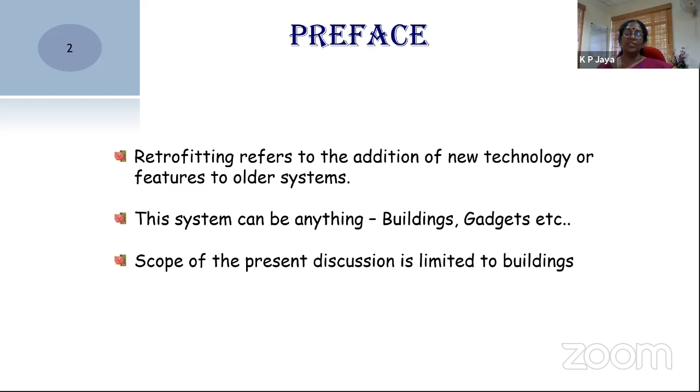Like what we are experiencing now with the corona effect—after some time, any crisis will pass by. This too will pass by. We will look forward with a positive attitude.

This is the effect of an earthquake. What is the after-effect? We are left with damaged structures and debris, as seen in the last slide.

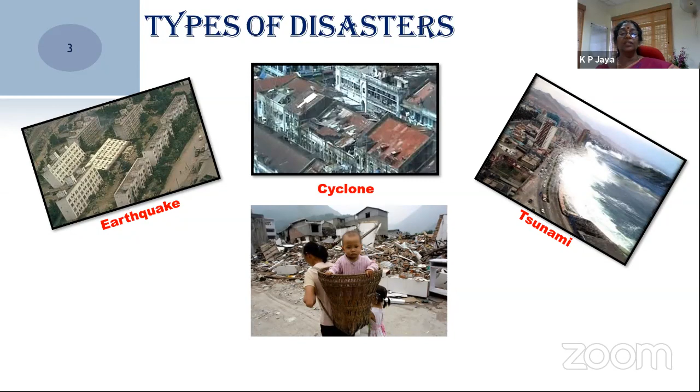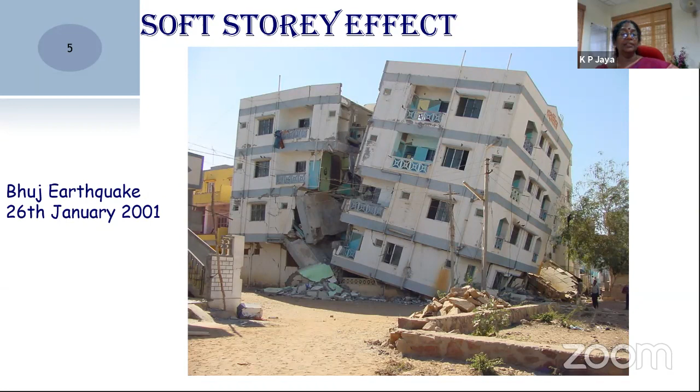This picture is also from the 2001 Bhuj earthquake. Until that earthquake occurred, we Indians were least bothered about designing structures for lateral loading. After that, people started thinking a lot and came out with proper solutions for building earthquake-resistant structures. Now look at the second figure.

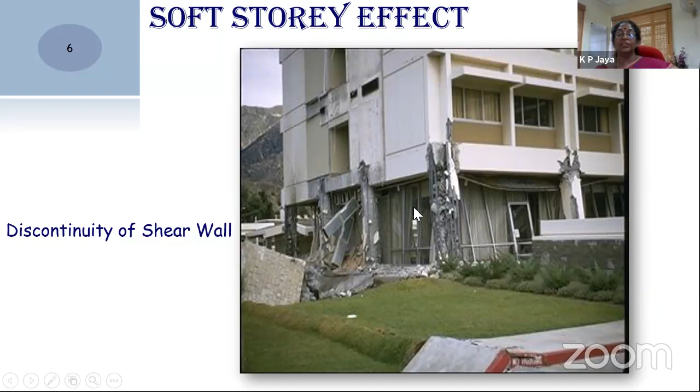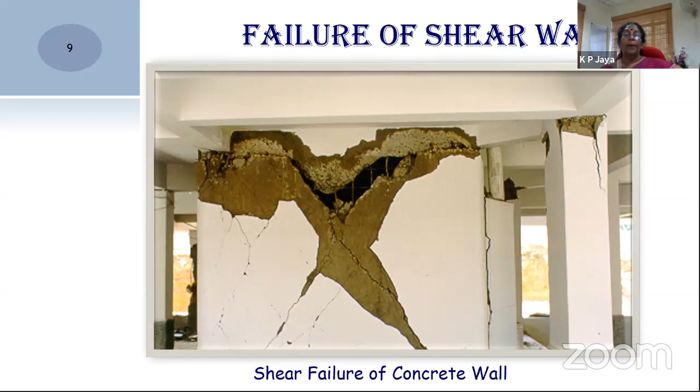This picture has introduced some fire into my mind, which led to giving this as a research topic to one of my research scholars, and she has come out with a very proper detailing between the shear wall and diaphragm.

Okay, next is the improper connection between the precast structures. You can see here, this is the precast plank, this is the precast beam, and here you can see the precast column, on this side and this side. This is the precast wall panel also.

And during the earthquake, what will happen? This column may be deflecting towards this side, and this column may be deflecting towards that side, which leads to opening up of the top surface of the structural system. So these planks will lose the supporting base from this portion and will fall down. Just look at the precast structural elements - all elements are very strong and intact without any failure. But what has failed? The connection has failed. At the end of the day, the structure has failed. So we need to give proper connection detailing between the precast structures too.

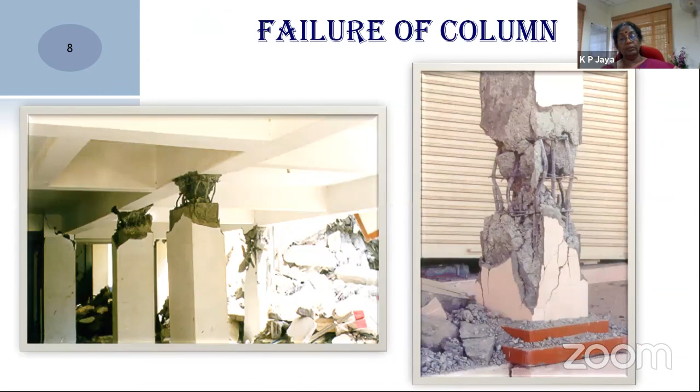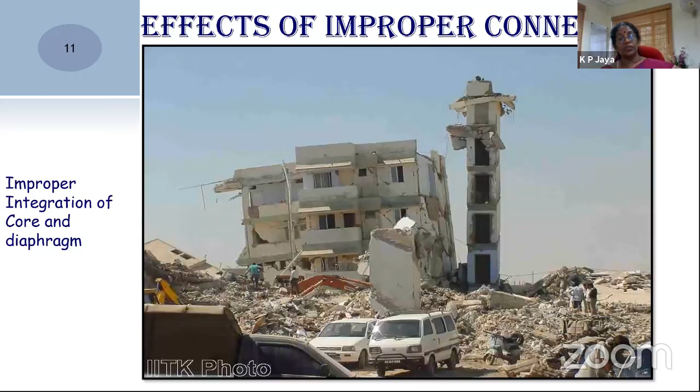So what is the remedial measure? I have discussed the failure patterns during a disaster, especially lateral loading, either earthquake or wind. These are the different types of failure which will be experienced by the system, and what are the remedial measures to arrest or avoid such failures.

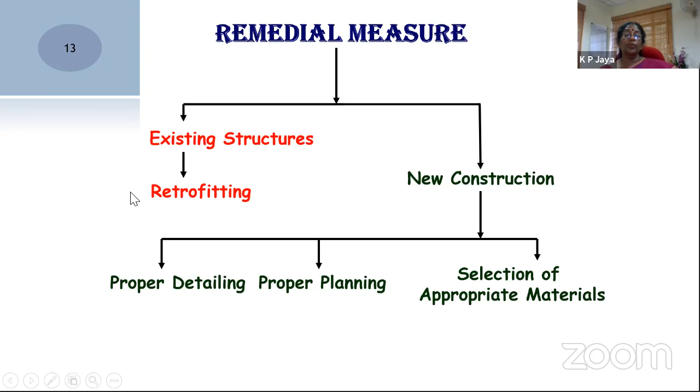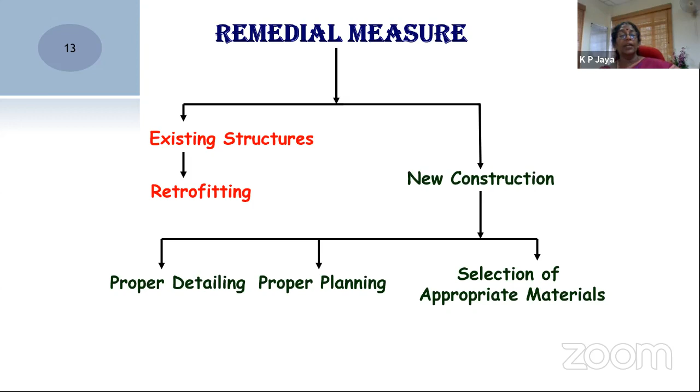For existing structures, we can go with retrofitting. If the structure is experiencing a very limited level of damage, which is serviceable even after the earthquake, we can go with retrofitting. In case of new construction, we can go with three strategies: proper detailing, proper planning, and selection of appropriate materials. So today's lecture is focusing on how we can avoid failure of structures which experience very limited levels of damage, which can be retrofitted back and put into use after an earthquake.

So, phases of the retrofit program. These slides show what phases have to be accommodated in case of retrofitting. First is vulnerability evaluation. Vulnerability evaluation means what is the level of damage possibility for a structure. This can be evaluated by considering the structural vulnerabilities of the overall system, the seismic hazard prescribed for that particular site, and socio-economic consequences. These three items will decide the vulnerability of that particular structure in the area under consideration.

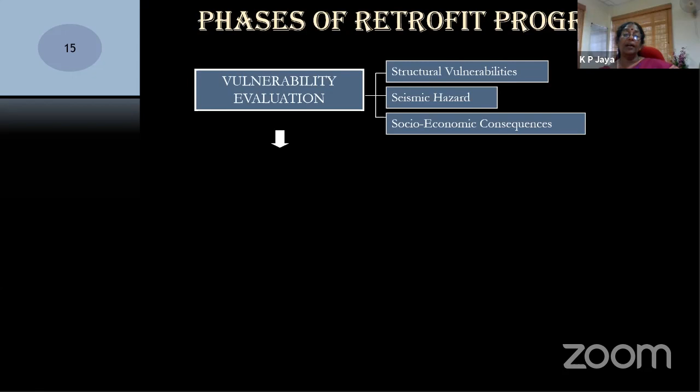Now look into this - the next step is evaluation of the existing system. System means system capacity. We have to evaluate the overall capacity of the global system and what is the demand, the seismic demand.

If an earthquake happens after 10 years, what will be the force exerted on the particular structure which is retrofitted? That is nothing but the seismic demand. There should be a proper ratio between demand and capacity. Demand should be much lesser than the capacity.

That ratio has very high importance in the system and the selection and design of retrofit measures. So member response and global response should be analyzed to choose the retrofitting measures to be adopted for the structural global system.

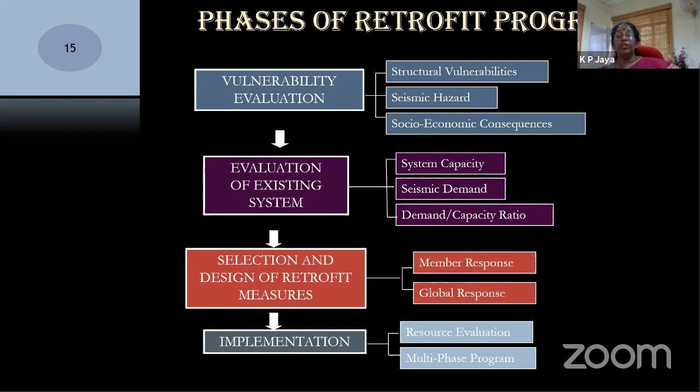Implementation is very, very important. We should find a very talented, experienced firm to execute the work. And resource evaluation - we should evaluate the resource capability of that company. It is a multi-phase program. Definitely, we have a lot of things to do while implementing the retrofitting methodologies.

This is the overall phase of the retrofitting program. First is vulnerability evaluation - evaluation of the existing system and defining the demand capacity ratio. Based on that, we should choose the design retrofitting measures to adopt and choose the appropriate executing agency.

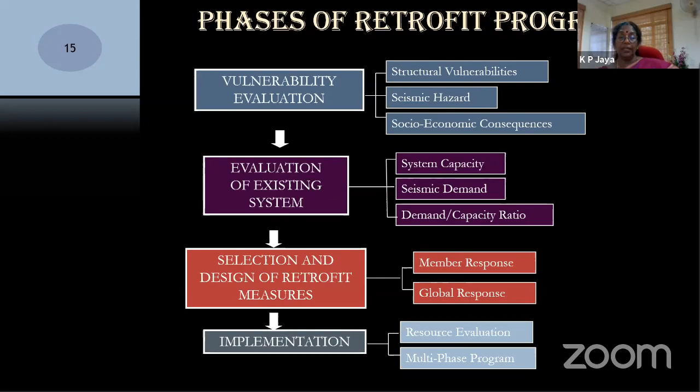First thing is seismic vulnerability evaluation. We should evaluate the site-specific hazard. It is based on local soil condition and soil response and failure.

So local soil conditions play an important role in deciding the excitation experienced by the building, and soil response as well as failure of the soil. If it is a very hilly area, the soil can experience sliding. So there are a lot of issues.

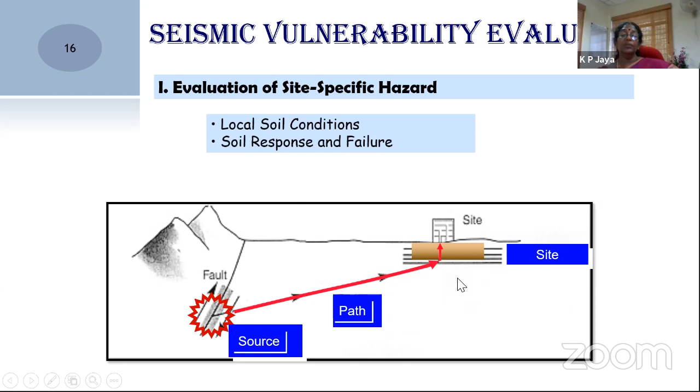You can see in the next slide, due to soil condition, structures can experience bulging of soil leading to failure of the structure. So this is the evaluation of site-specific hazard. Soil condition plays a very important role in developing these types of damages to the structure.

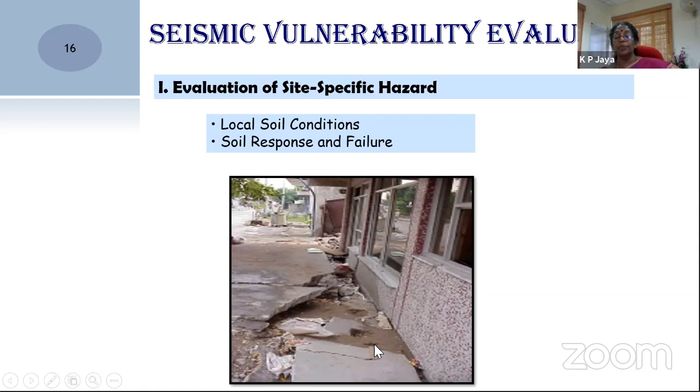Now come to the evaluation of structural vulnerability. We should evaluate the capacity and, at the end of the day, what will be the demand on the structure. Based on that, we have to identify the appropriate geometry - it has to be symmetrical in plan as well as in verticality.

When evaluating structural vulnerability, the date of design and construction is very, very important. The residual strength of the structure has to be evaluated to arrive at the demand capacity ratio.

So this is the global vulnerability evaluation strategy. When you come to the local or elemental level, what are the vulnerability evaluations? We have to concentrate on these elements - columns, beams, and so on. First I'm talking about this column.

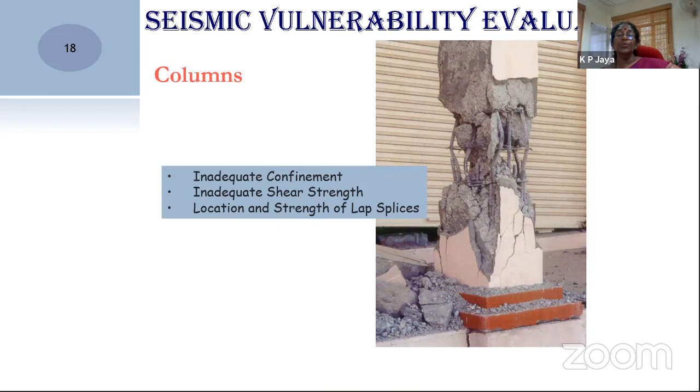Just look at this picture. This damage is due to inadequate confinement, inadequate shear strength, and location and strength of lap splices. So these are the reasons for the failure of this particular column.

In order to avoid this type of failure, what strategies do we have to adopt? We have to adopt that while doing the retrofitting.

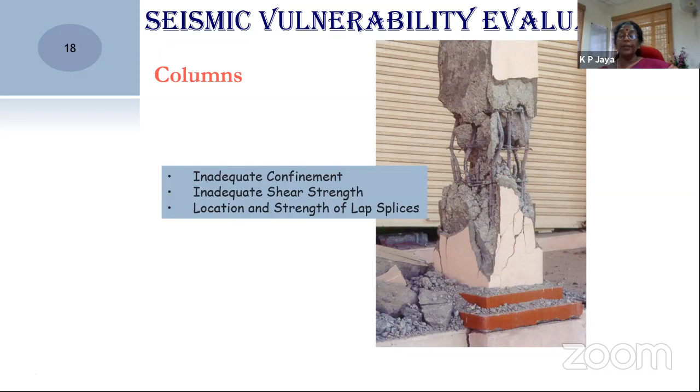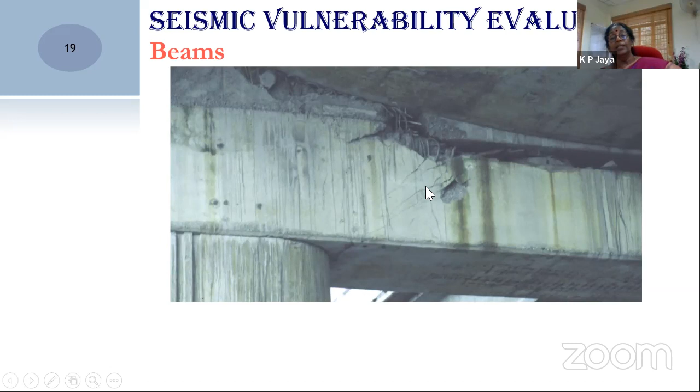Next comes the beam. Just look at this failed beam. It has failed at the top surfaces, and you can see the shear cracks in these beam surfaces. This may be due to reduced flexural strength, or insufficient bar anchorage, inadequate shear strength.

That has led to the failure of the structure with development of shear cracks here, inadequate strength in torsion - it is subjected to torsional warping also. So all these things, flexural, shear, and torsion, have caused the failure of this particular beam. So again, we have to identify the proper retrofitting strategy to regain the strength of this particular beam.

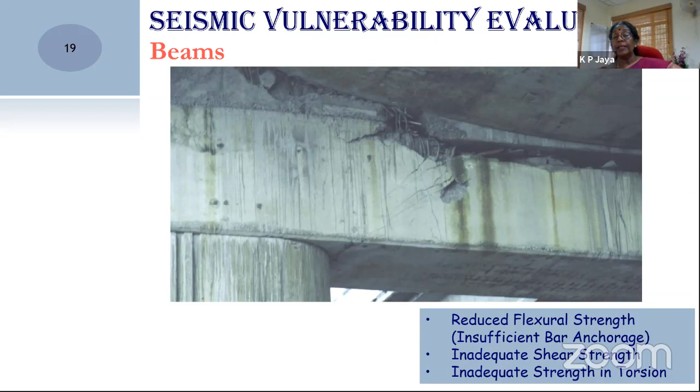Then look at the joints. Joints are very, very critical, crucial locations. You see here, this is the beam-column joint - this is the column and the beam. Due to shear crack development at the joint region, the joint has experienced spalling of concrete.

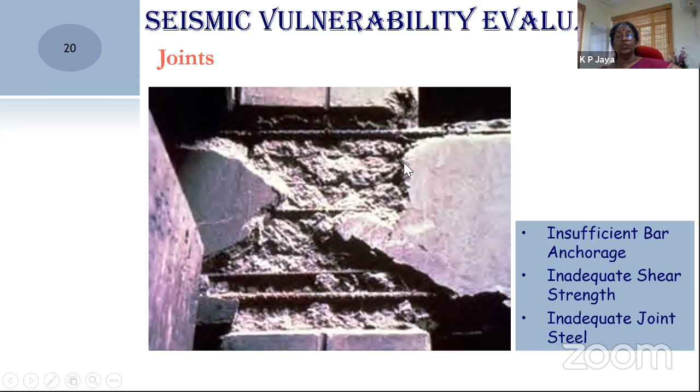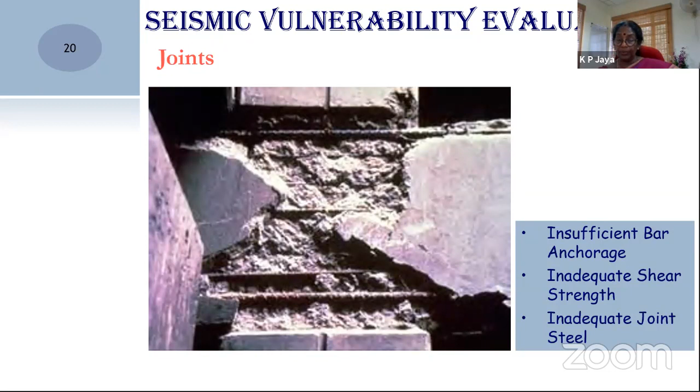The shear reinforcement has been exposed, and there is a possibility for retrofitting this particular joint. And this says what is the reason for failure of this joint region. So when you are retrofitting the joint, we should look at the reasons for failure. We have to attack the reasons from the root cause and do the retrofitting methods.

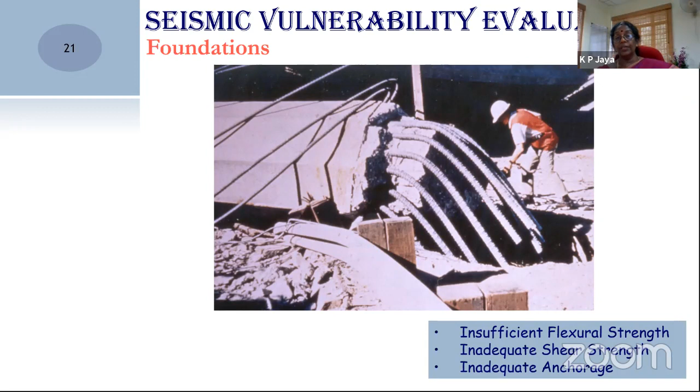You have the columns with the dimensions 300 by 300 or something like that. We will replace some part of the concrete and we'll add some also with a higher strength of concrete. That is what is called the replacement of concrete members. Or sometimes we will replace a column with a shear wall. That also comes under this category.

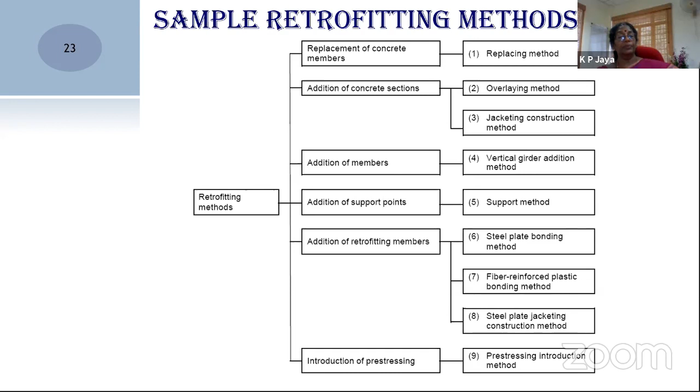So how can we approach the retrofitting method? There are two basic strategies, the global method as well as the local method. Global has two main categories: conventional method and non-conventional method. The conventional method is, as I told you in the previous slide, we can add additional shear wall, additional infill. These two will add additional stiffness to the floor.

This additional infill methodology has been adopted in some of the buildings in the Bhuj area after the earthquake. Imparting additional infill will enhance the stiffness in that particular floor. And adding bracing also will impart additional stiffness to the system. And sometimes this bracing can be a damping system we can introduce.

Thereby we can impart some system which is capable enough to dissipate the energy which is hitting the structure. And adding additional wing walls will give additional stiffness to the system. Wall thickening and mass reduction. That is a very innovative method. With mass reduction, we can reduce the mass overlaid on top of the vertical elements. Thereby we can safeguard the system.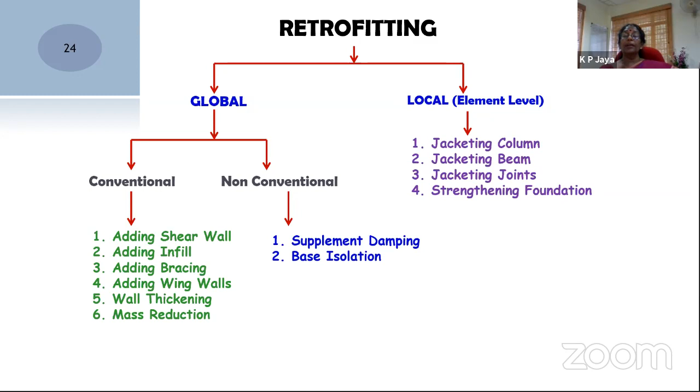And local or element level retrofitting strategies can be adopted, like jacketing columns, jacketing beams, jacketing joints, and strengthening the foundations. This is the difference between the global and the local system. In the global system, we are enhancing the performance of the overall system. In the local retrofitting, we are enhancing the performance of the individual elements.

Now I'll attack global retrofitting strategies. You can see here, this is what I told. This is a retrofitted open ground story building after the Bhuj earthquake in 2001. You can see here, this is additional brickwork. Here also you can see additional brickwork. This is a residential building which has been given parking space at the bottom floor, thereby given openings at this point and this point.

During the analysis of this particular structure, it is understood that the bottom story has less stiffness compared to the top story. You can see here all the intermediate portions between the columns on the first floor as well as the second floor have been filled with brick wall. But in the bottom story, only one column was here and another column was here. And this portion was open, which led to lesser stiffness at the ground story.

And after analysis it is understood that it is not necessary that all openings have to be closed. You can see here, this particular opening is still open. We can identify appropriate locations where we can provide an infill to enhance the stiffness of that floor. Accordingly, we can fill in with brick masonry. This is only brick masonry, not reinforced concrete. This will improve the stiffness of the ground story, thereby leading to the safety of the system. This is the installation of masonry wall to enhance the overall performance of the structure in a global strategic manner.

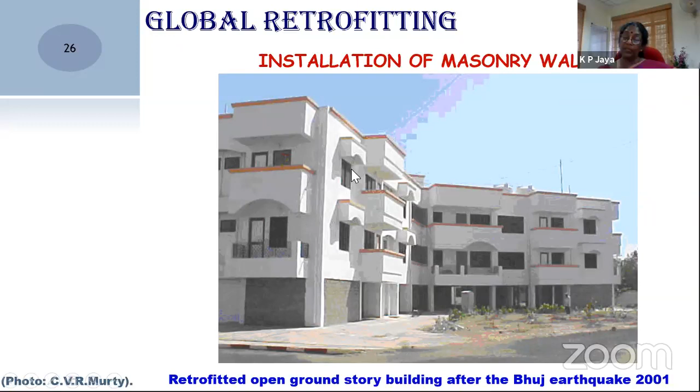This you can see here, installation of new shear wall. Here you can see before retrofitting, this area was infilled with brick wall. In order to improve the stiffness of the system, these brick infill walls have been replaced with the RC shear wall. This is the installation of new shear wall. This shear wall you can see here.

In this particular case, the column has been supported on an isolated footing. This column has been supported on an isolated footing. And in this case, these two have been combined with the additional foundation at this area. And the shear wall reinforcement needs to be extended to the bottom foundation to get sufficient strength in the system.

So this is another methodology. I have taken this courtesy of Professor C.V.R. Murty. He is a pioneer in the area of earthquake engineering. So these are the strategies suggested by the earthquake community to enhance the strength of structures with the introduction of shear walls.

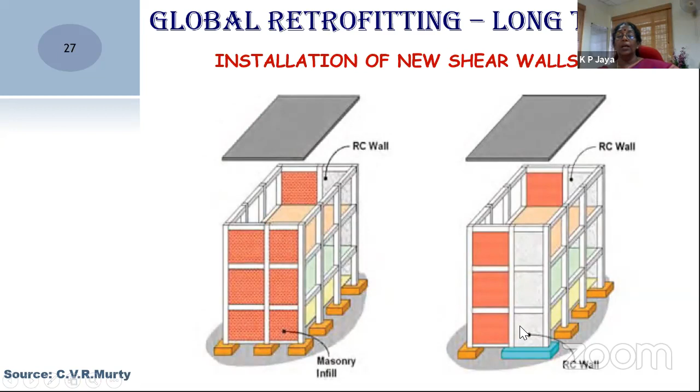Now, while introducing the shear wall, you can see here, this has to be properly stitched. This is the boundary element. This would have been a column at the extreme end. You can see in the previous slide, one column is here, another column is here. The reinforcements from the shear walls need to be stitched with these columns on either side as well as the beam on the top. That is what the picture shows in this slide.

You can see here, this is a new shear wall. This is the existing frame, this is a beam, and this is a column. And this is the introduced shear wall, which has to be linked with the existing elements through dowels, which have to be passed through the beams. For that, we need to drill holes through the beam without disturbing the existing longitudinal reinforcement of the beams. These are the dowel bars, introduced to connect the existing frame to the newly introduced shear wall. This is very, very important.

Dowels through the existing structure, whether through the columns or through the beams, have to be extended fully. This is the earlier frame. Into that, these beams have to be drilled to introduce this shear wall. And in addition to all those things, the shear wall will have its own reinforcement.

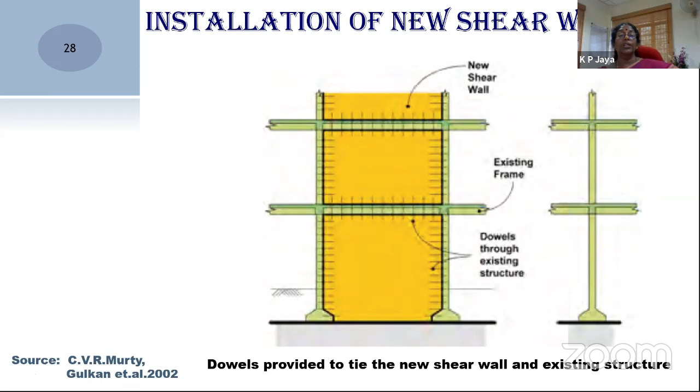So this should be the strategy to be adopted by installing the new shear walls. Coming to the picturization, that is the typical symbolic representation. This is the actual picture from the site. This was the earlier available column, and here also an additional column was there. This is a newly introduced shear wall.

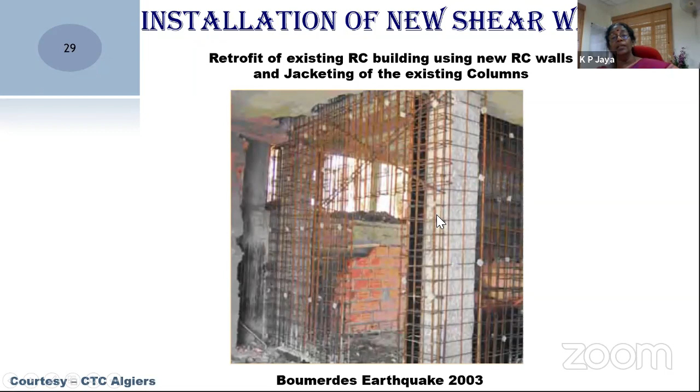You can see here the reinforcement passing through these beams as well as the slabs. You can see here the shear wall reinforcement has been drilled through the slab area and protruded outwards. And the intermediate area, this beam area, will be introduced with additional shear dowel bars.

You can see this is nothing but global retrofitting using braces. This is an open area, open space between the columns, and here also it's open. This can be introduced with the braces, which will in turn increase the stiffness in this particular area. It is not mandatory that all openings need to be retrofitted with braces. We can judiciously decide which area's stiffness is to be improved with the introduction of the braces.

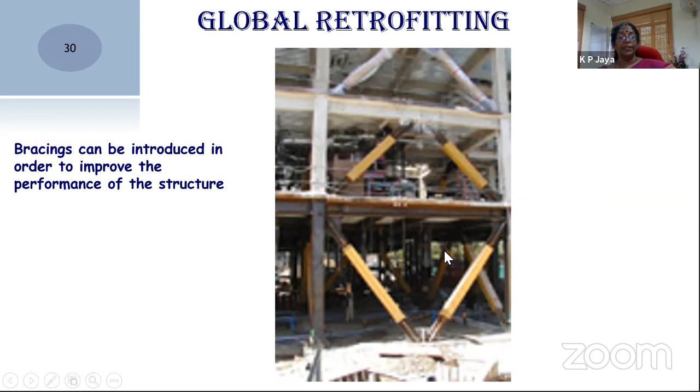This is very much available in the market. You bring it and properly connect it with the vertical element and the horizontal element. Proper anchorage has to be provided. So there are different types of braces. You can see here, this is concentric braces. You can see another, eccentric braces, K braces. These are varieties of braces we will be able to introduce into the system.

You can see here, as Hema has mentioned, she has worked with me for her PhD, and she has introduced a tuned mass damper for her work. The tuned mass damper is nothing but the water tank on top of the building. So she has identified the proper location where the water tank has to be introduced to impart the tuned mass effect into the structure and thereby reduce the vibration in the system.

So I am highly proud to say that she has done her work very well, and her evaluation was also by very reputed examiners from India as well as abroad.

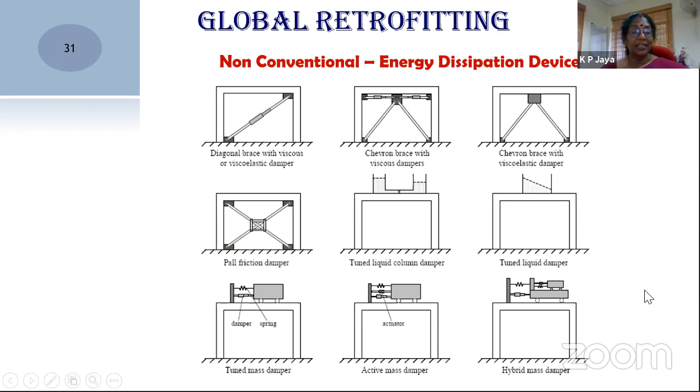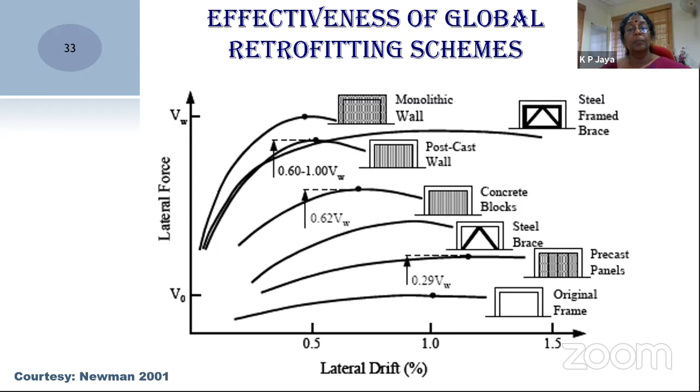And this I was talking about the global retrofitting. When it comes to the local retrofitting, how we can impart it at local level, you can see in this picture, strengthening of the column can be either by concrete jacketing, steel jacketing.

Hema, are you there? Ma'am, I'm here, ma'am. Okay, so how much more time will you give me? Ma'am, you can take, ma'am. Another 20 minutes is there, ma'am. Okay, fine. It's audible now, Hema? Yes, ma'am, it's audible, ma'am. Definitely, it is quite difficult to take without seeing the audience. Okay.

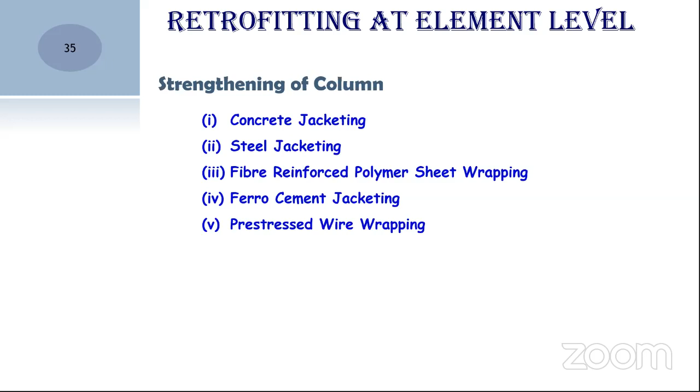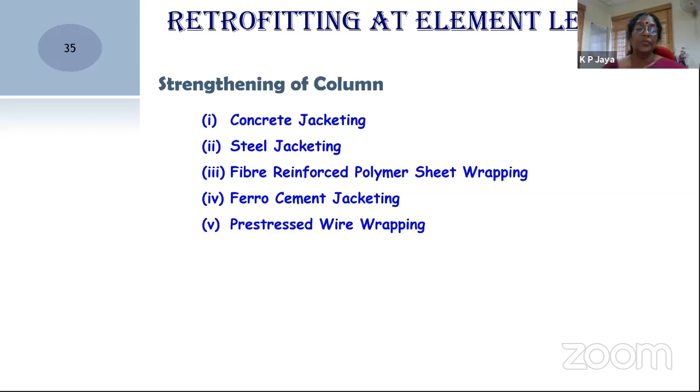So strengthening of column either by concrete jacketing or steel jacketing, fiber reinforced polymer sheet wrapping, so nothing but FRP wrapping, and ferrocement jacketing, pre-stressed wire wrapping. These are the various methods adopted for strengthening the columns. I have taken this picture from IS 13935/1993. So it shows a clear picturization.

The dotted one, this area which I marked as one, is nothing but the existing column. This is the jacketing area. While jacketing, you have to introduce additional reinforcement. This is the additional reinforcement you can see here. Number 3 is the vertical longitudinal reinforcement, which is added additionally for this jacketing concrete.

And number 5 is nothing but the hole. These vertical elements have to be bounded by stirrups, and this is the jacket which has to be integrated with the existing column. That's why this pocket has been introduced, and these are the dowels which connect this existing column and the jacketed concrete. So this is the method suggested by the IS code itself.

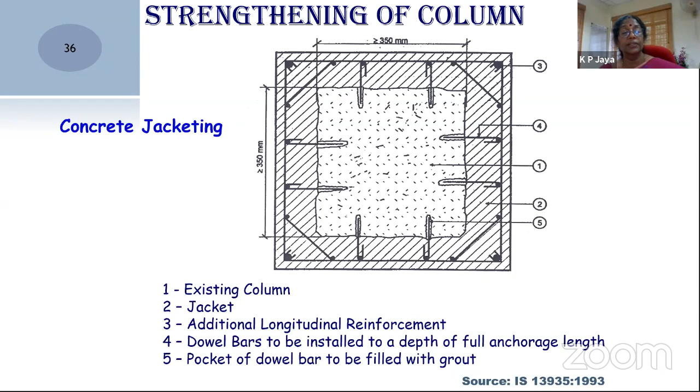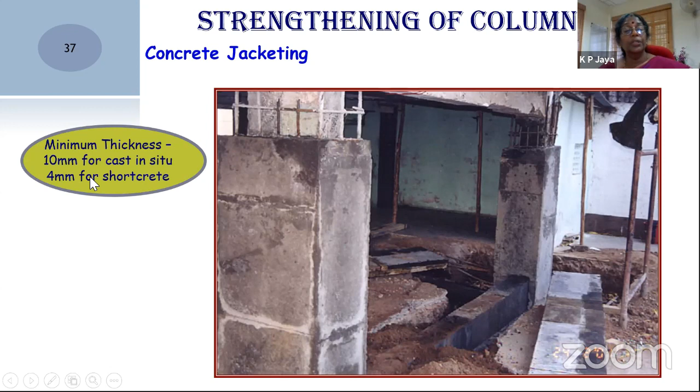Here is an actual picture of the retrofitting strategy. This is the existing column. This is the jacketed concrete. There are a few precautions we have to take. Minimum thickness should be 10 mm for cast in situ concrete and 4 mm for shotcrete concrete. And adequate shear keys have to be provided to introduce proper integrity and compatibility between the existing column and the jacketed concrete.

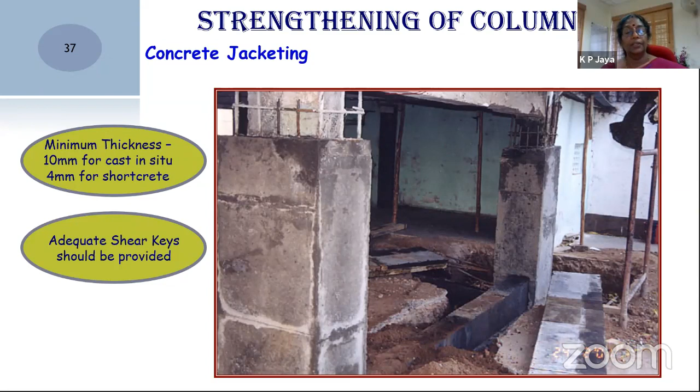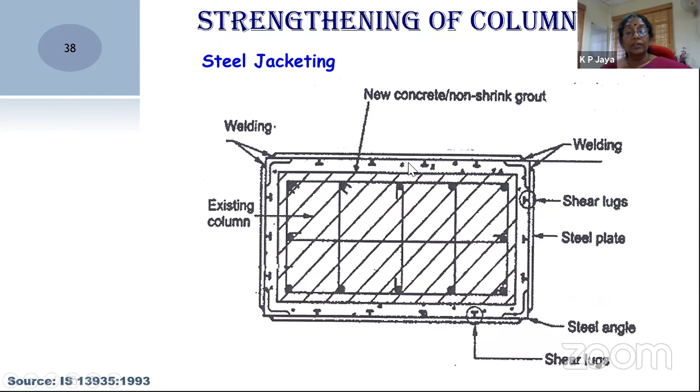And this is nothing but steel jacketing. Similar to the previous one, this is the existing column, and we can introduce the jacketing with the steel sheets, which has to be connected. Here you can see the steel angle, which is imparted to the concrete area, and these are the shear lugs connecting this concrete, the connecting element and the existing column.

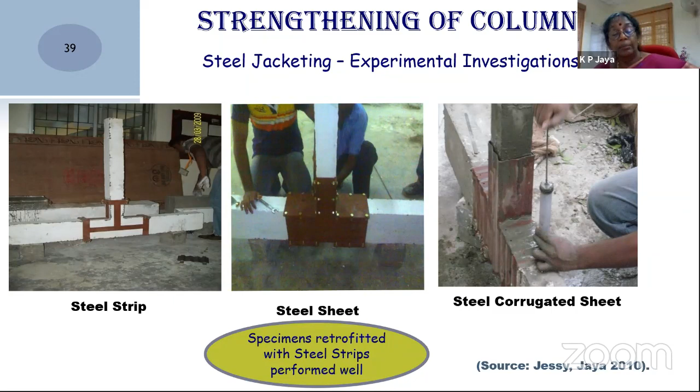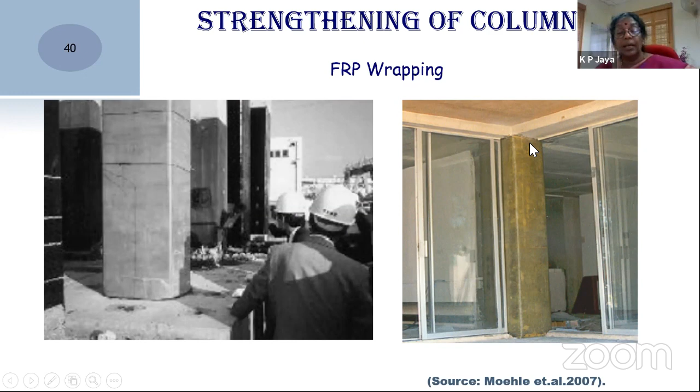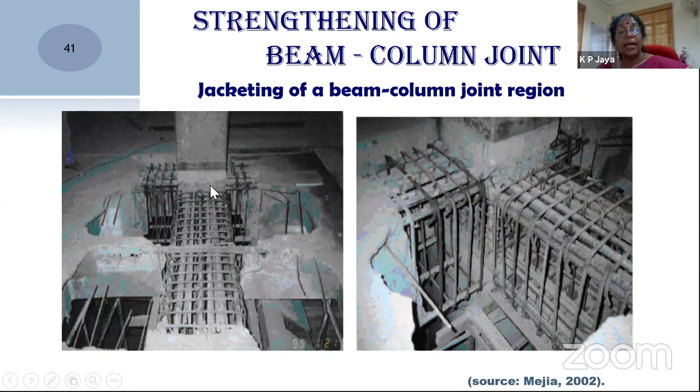And this is nothing but the FRP jacketing. This is a column which is wrapped with FRP, and this is at the initial stages. Here you can see the wrapped columns. Come to the next slide. This is a jacketing of the beam column joint, RC jacketing. The beam column joint has been exposed. Additional wrapping reinforcement has been provided, and later it has been concreted.

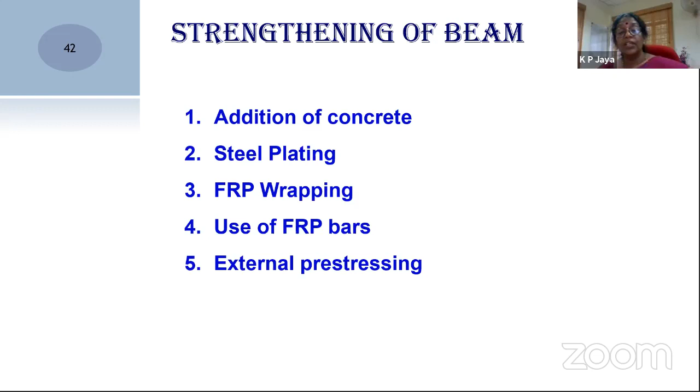Now come to the strengthening of the beams. Again, addition of concrete, steel plating, FRP and FRP bars. These are FRP bars. Externally, they can be introduced and concreted with proper concrete of appropriate strength, and external pre-stressing also can be imparted for strengthening the beam. These are again pictures taken from IS 13935:1993. While retrofitting the beams, you can choose any one of the strategies.

If it is rounded about throughout the beam, you have to run this reinforcement, whatever be the confining reinforcement or stirrups, through this existing slab and take it out like this. Here the stirrups have to be taken through the beam, and this is the jacketed concrete.

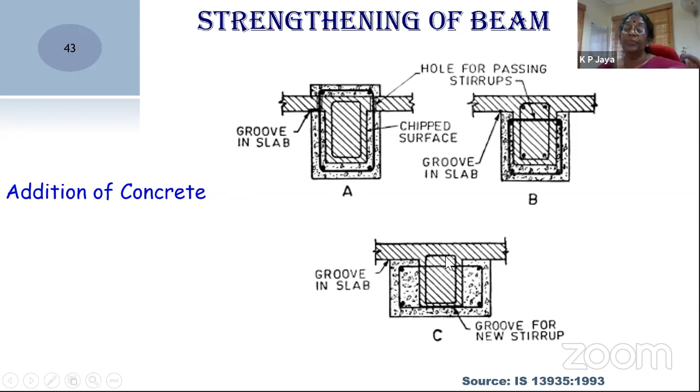In this case, if you need a wider beam, you can go with this type, but there should be a limit for the additional thickness of this added beam jacket. So we have to take all precautions prescribed by IS 13935 with respect to the strength of the concrete and the strength of the steel adopted; there should not be a big disparity between the steel of the existing element and what you are adding to the system.

And this is the picture for FRP wrapping. You can see here there is a necessity to clean the surface and wrap the FRP. And this is the bonding agent. The main problem with FRP wrapping is that it is subject to delamination of the wrapped system, and it is generally prescribed for use on elements with rounded edges.

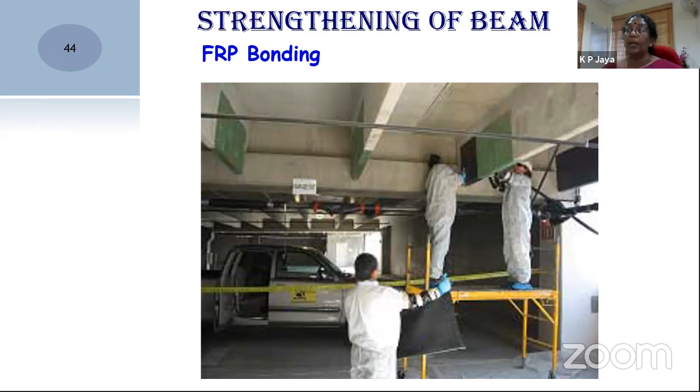You can see the sharp edge over here. Once it is subjected to some level of loading, this sharp edge, with its higher stress concentration, will lead to delamination of the jacketed FRP. So we need to be more careful in that area, and the surface to which the FRP is bonded has to be appropriately prepared.

This is a structure where retrofitting strategies were developed with FRP bonding. The building is from Las Vegas, Nevada, the Panorama condominiums. Look at this beautiful structure, which has been retrofitted with FRP bonding after the earthquake event.

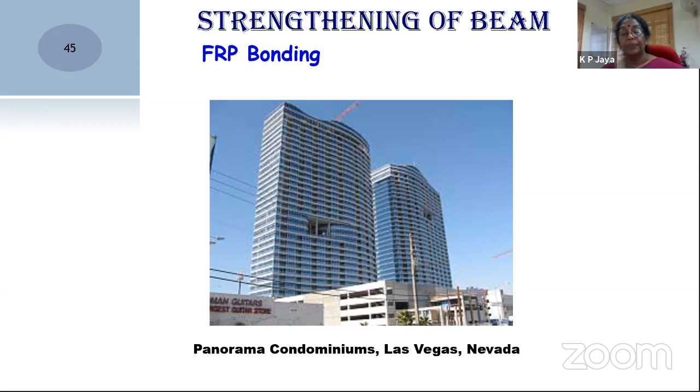One case study I have taken from High Tech Solutions Chennai; they have implemented steel jacketing, and there are 2-3 case studies. For this case study on steel jacketing, I will show what exactly they have done at the site. This is the building where they have implemented the steel jacketing philosophy.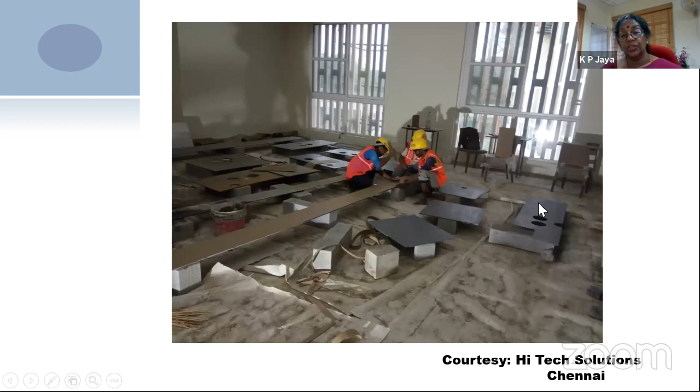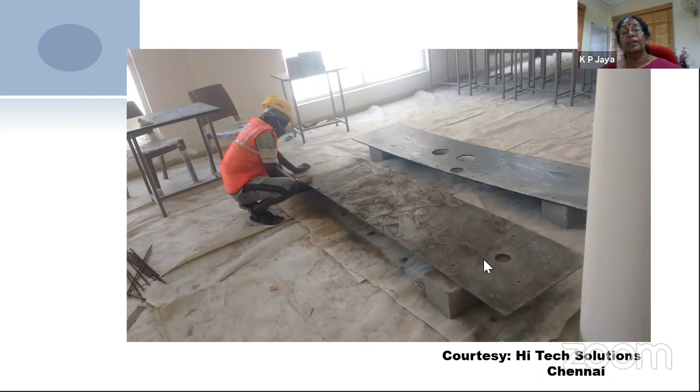And this is cutting wherever they need additional cutting; you can see they have marked the holes and are doing the cutting process. Again, it is preparation of the sheet for fixing to the beam. For surface preparation, so it should not corrode later, they are treating the surface of the steel sheet before fixing it on the beam.

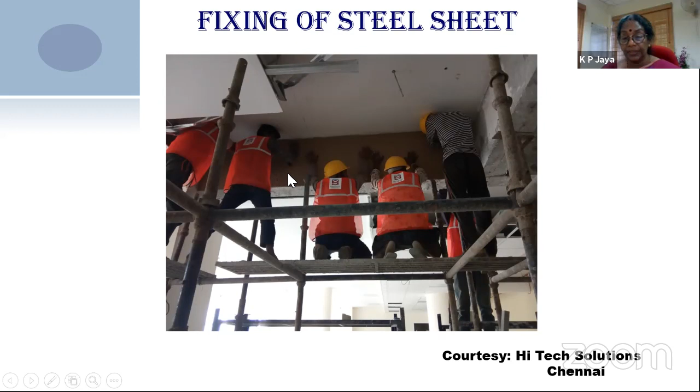You can see this is the beam which is running. You can see the bottom of the beam; the surface has been properly treated, the steel surface also has been properly treated, and it is fixed at the face. Here you can see different types of work carried out. This is the surface on which they will put the bonding agent, and sufficient shear keys are to be introduced between the steel plate and the existing beam.

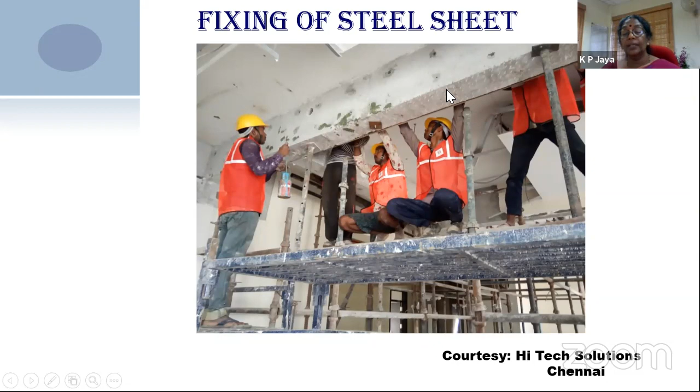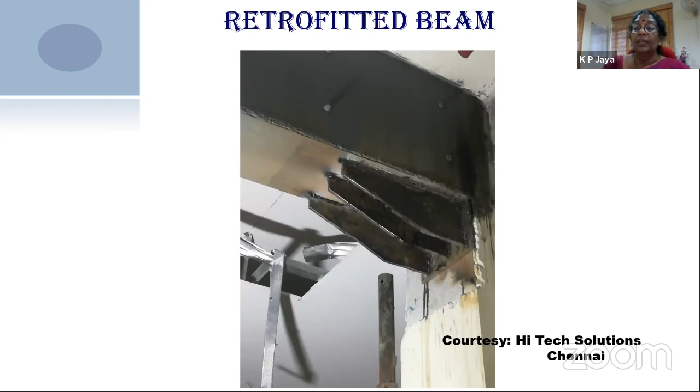I give my gratitude to Hi Tech Solutions, who have shared all these slides with me. And the next step is FRP wrapping.

This is the FRP; they will prepare the surface of the beam and provide this FRP. You can see here these holes have been provided to pass the MEP lines.

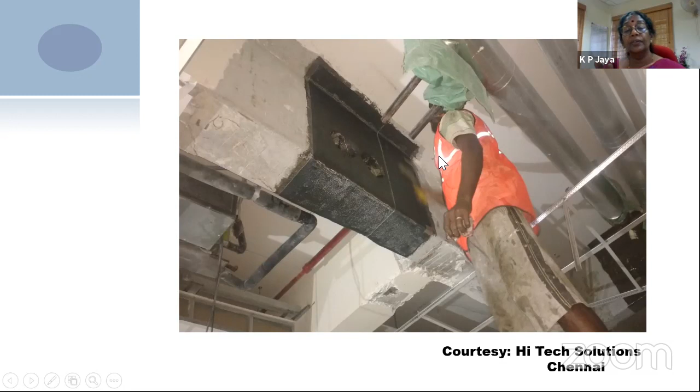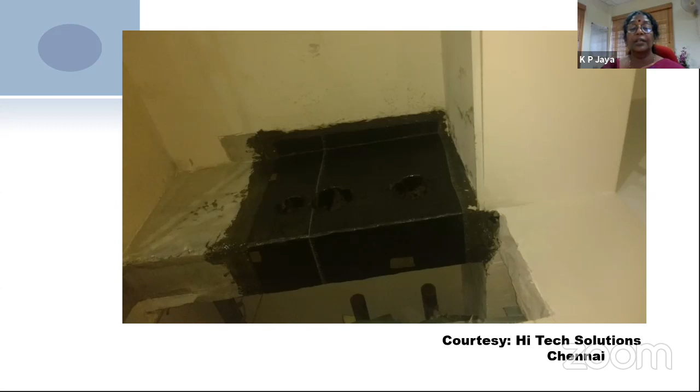See, this is the final look of that. After this, they will do all the painting work on top of this thing. This is the FRP wrapped retrofitted beam element. You can see here all the fixing of the FRP is very important. It should not leave out any single air gap between the surface and the FRP. Otherwise, there is no point in doing this.

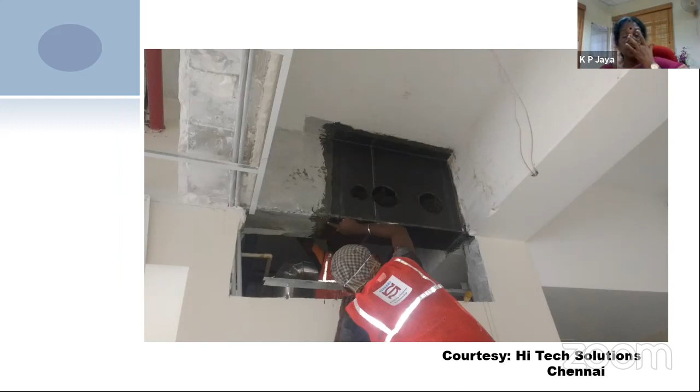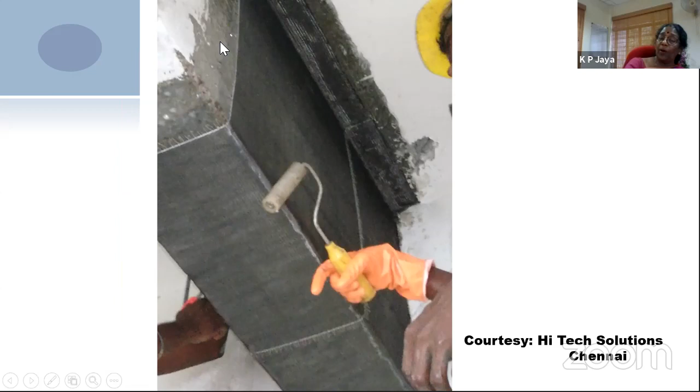This is a very crucial and critical retrofitting strategy. For RC jacketing, it's a very straightforward method. Generally, the failure of retrofitted elements will be much less for the RC jacketing retrofitting methodology compared to FRP wrapping. So you can see here, this is the final look of that. You can see all these fibers are protruded out of this. This has to be properly treated and proper adhesives have to be adopted while doing this method.

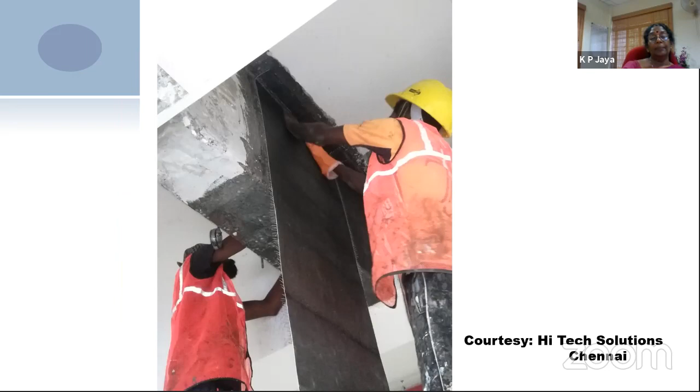You can see here, this is the sequential process of FRP wrapping. And this is just like that. I have put a slide on, but I'm not going to discuss anything more about this.

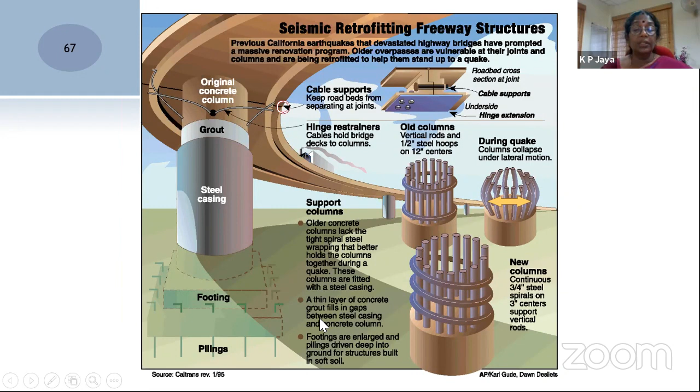This is the bridge structure and retrofitting of the pier elements supporting it. And what is the final goal of all this retrofitting? It is to ensure an increased lateral strength and stiffness of the building, and to increase the ductility of the building, also to increase the integral action and continuity of the member in the building.

We need compatibility between the systems, and to eliminate or reduce the effect of irregularities. This is very important. Irregularity in the form of vertical stiffness or lateral load resisting system - we have to find some solution to avoid these types of irregularities and to enhance the redundancy in the lateral load resisting system. Enhance the redundancy means if anything happens to one element, the remaining elements have to have the capacity to withstand the lateral load. That will lead to the safety of the system.

So, to enhance the redundancy in the lateral load resisting system and to ensure adequate stability against overturning and sliding - this is the final goal of retrofitting of any system.

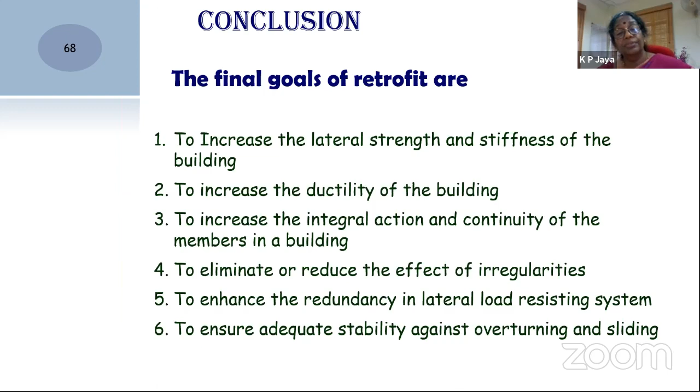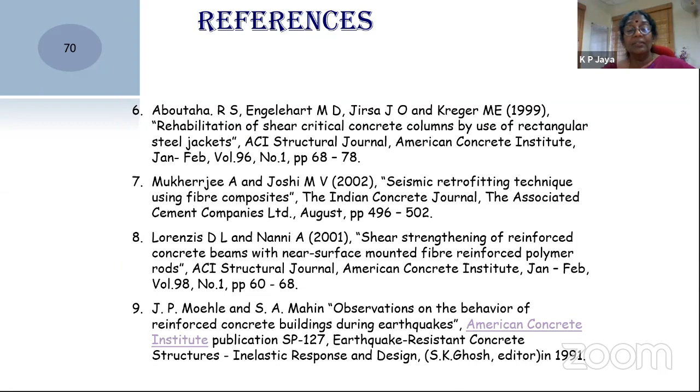And these are the references: ACI, FEMA, IS codes, Gol, and Aboutaha, Mukherjee. They have done a lot of work in that area. Thank you so much.